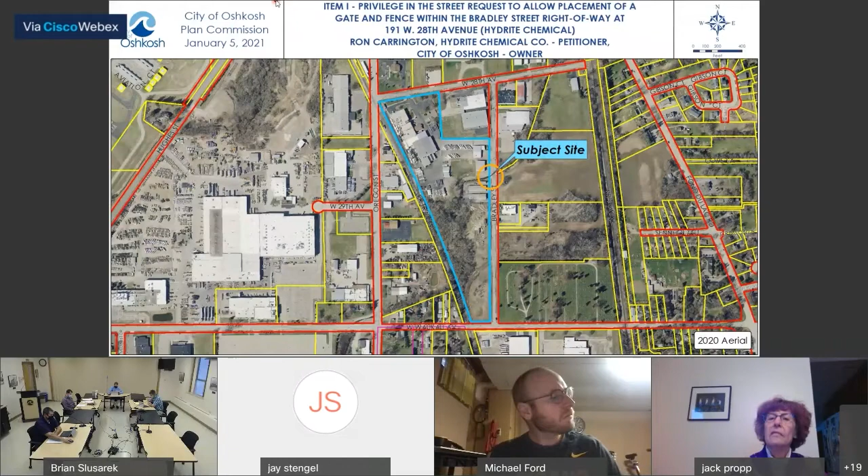Hydrite Chemical is requesting a privilege in the Bradley Street right-of-way to allow construction of an 8-foot tall chain link gate and fence with barbed wire, which will run over a portion of Merritt's Creek. The proposed gate and fencing is part of the new rail yard development, which received SIP approval in mid-2020. The subject site consists of a 19-acre parcel with frontages on West 28th Avenue, Bradley Street, and West Waukau Avenue. The property is occupied by Hydrite Chemical and includes industrial buildings, storage buildings, paved parking storage, outdoor storage areas, as well as a railroad connection. The general area consists of mostly commercial and industrial uses with some vacant parcels.

This up on the screen is the specific location of the proposed privilege request. The new rail yard requires a secure perimeter per the Department of Homeland Security guidelines. The east boundary along Bradley Street includes a crossing of Merritt's Creek, which is a stream that goes underneath Bradley Street.

With the existing culverts going underneath Bradley Street, there isn't enough room on private property to install the perimeter fencing, so the applicant is requesting to install the fencing where that blue line is shown, which encroaches into the Bradley Street right-of-way. The applicant states that this is a temporary situation. In 2022, the Department of Public Works is planned to reconstruct Bradley Street, and at that time the fencing will be properly addressed so it is located entirely on Hydrite's property. The proposed location of the fence will extend about 7 feet beyond the western edge of the existing roadway, approximately where the blue line is shown.

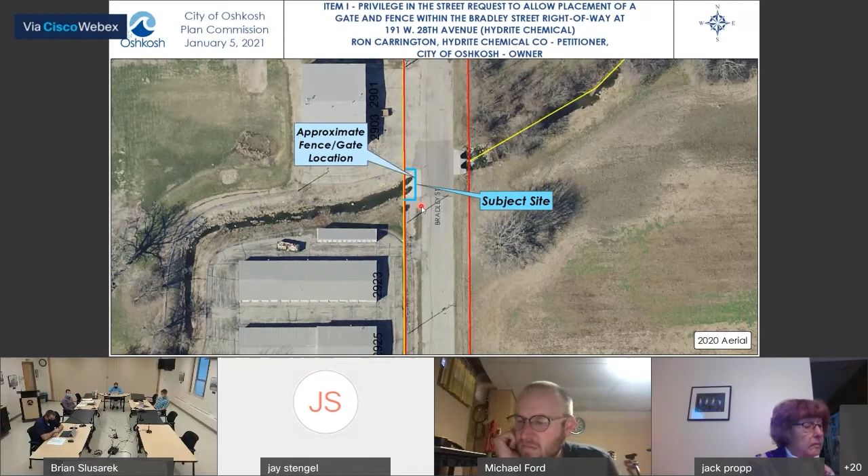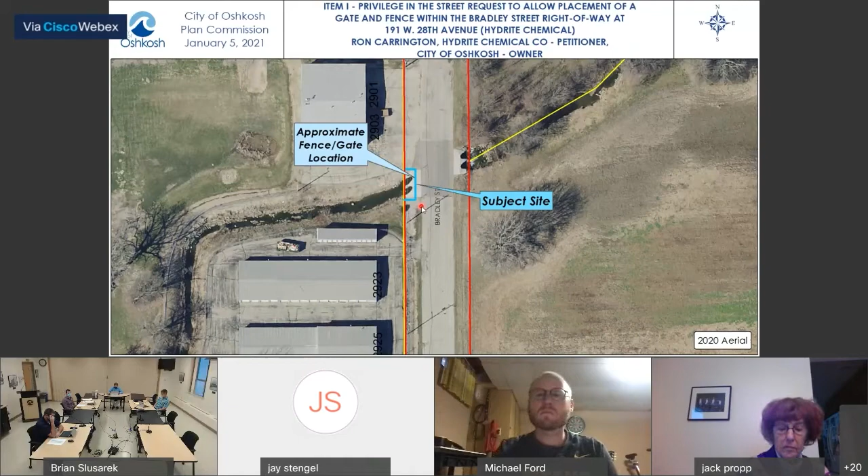The Department of Public Works has reviewed this request and provided comments, which have been included with the conditions that I will briefly go over. Since this privilege request is meant to be temporary and is a requirement of Homeland Security, staff is supportive of this request and recommends approval of the privilege in this right-of-way with conditions.

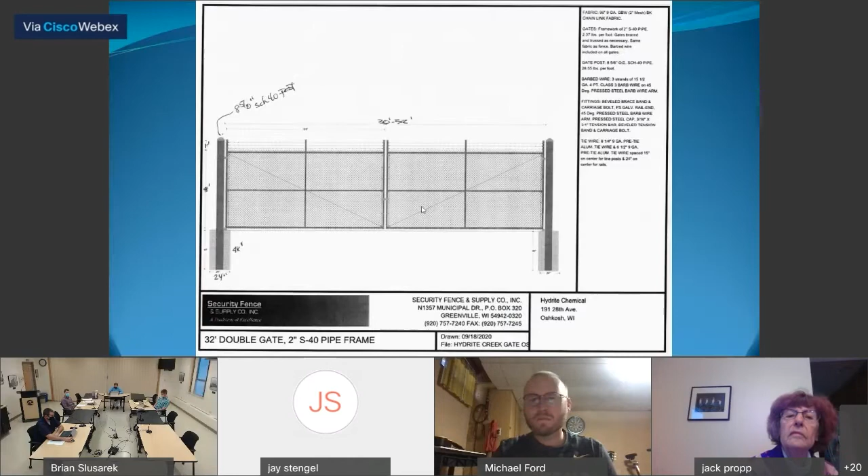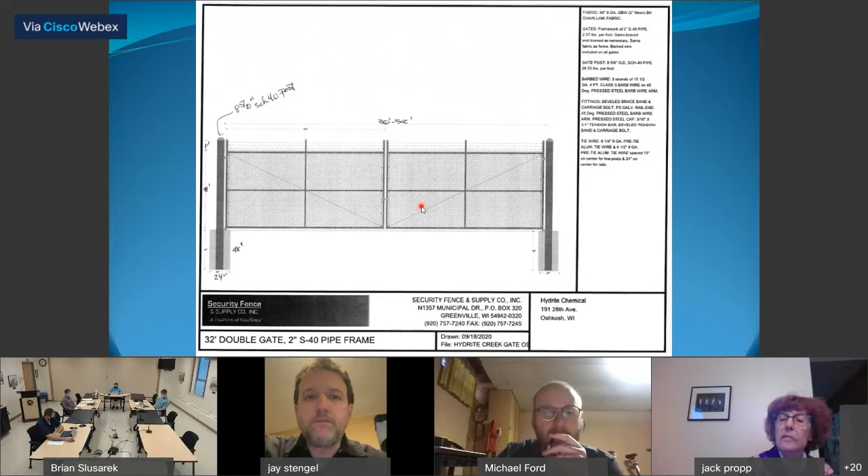This is the site plan provided by the applicant, and another site plan there. This is a proposed layout of the proposed fencing. The fencing will have a gate mechanism to allow city access to the culvert. With that, staff is recommending approval of the privilege request.

As you've seen before, privilege requests typically have several conditions associated with them. I won't go through each one, but there are 12 in total. The city attorney's office, the Department of Public Works, and the applicant will work together to prepare the final agreement documents.

Okay, thank you. We'll now come to the commission. Anybody have any technical questions? I do not see any hands raised.

Seeing none, then we'll go to public. Anyone here from the public like to speak to this item? Again, I do not see any hands raised as people wanting to speak.

Seeing none, bring it back to the commission for a motion and any other discussion. Anyone from the planning commission ready to make a motion?

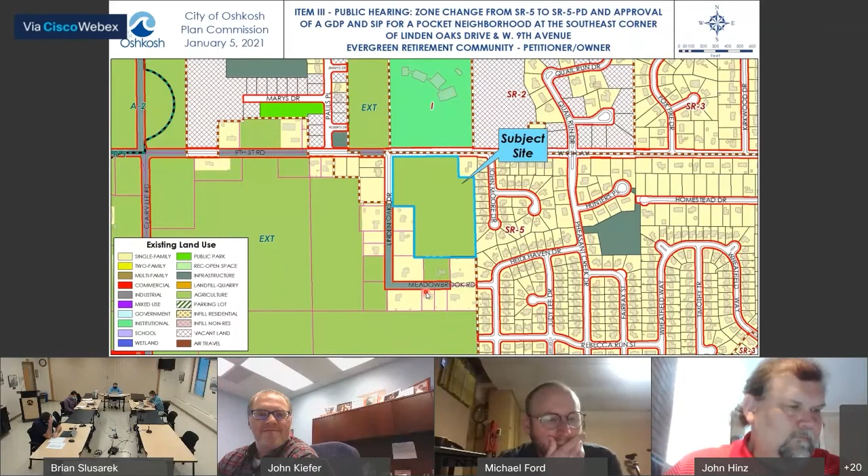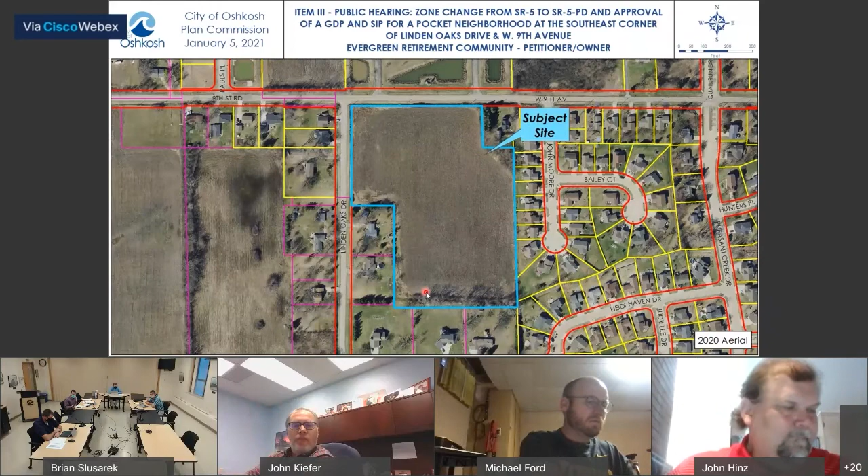This item includes a rezone to a planned development overlay, as well as a request for general development plan and specific implementation plan approval. The subject site is located at the corner of West 9th Avenue and Linden Oaks Drive. It's a vacant parcel, about 10.5 acres in size. The surrounding land uses are predominantly single-family, along with a church to the north. The 2040 comprehensive land use plan recommends low-density residential for the site. It is currently zoned SR5. Here's a view of the subject site.

The applicant is requesting to develop a 40-home pocket neighborhood. It will function similar to a residential subdivision; however, the development will fall under the purview of a multifamily development, as all homes will be located within a single lot. All homes will be single-family ranch-style residences for older adults, and there will also be a clubhouse on the north side of the site. Since the SR5 district does not allow for multifamily uses, the applicant is requesting to rezone the site to have a planned development overlay, and then requesting a BSM to allow the multifamily use.

The proposed pocket neighborhood will have a density of 3.79 units per acre, which is in line with the SR5 district provision of 5 units per acre. It's also consistent with the 2040 comprehensive land use plan recommendation of low density residential. Staff does feel this is an appropriate use for the site, so we're in support of a BSM to allow the multifamily use.

The applicant did hold a virtual neighborhood meeting on December 1st, and the neighbors were generally supportive of the proposed land use. Staff is supportive of adding the planned development overlay, as the intent is to accommodate a unique land use. As far as site design, there will be two accesses, one from West 9th Avenue and one from Linden Oaks Drive. Each home will have a 2-car attached garage for parking.

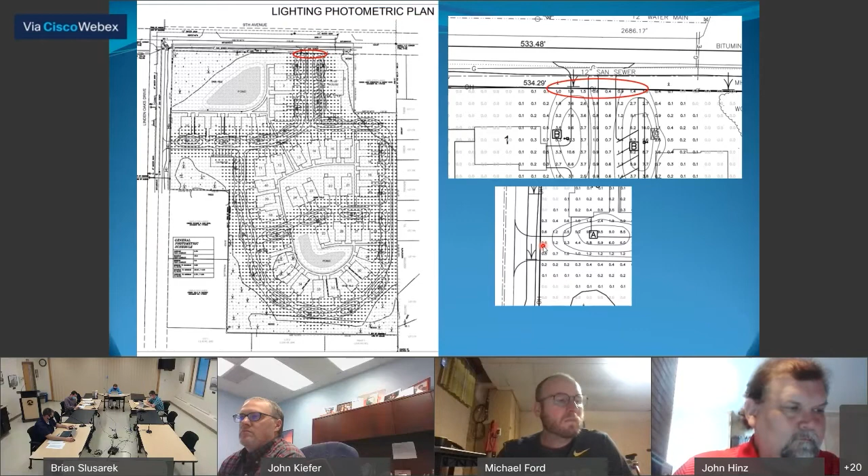Here is the lighting plan. It meets the 0.4-foot candle minimum requirement for all parking and circulation areas. It also is within the maximum of 0.5-foot candle light trespass at all property lines, with the exception of the 9th Avenue entrance, which exceeds it, and it's right about at the maximum at the Linden Oaks entrance.

The applicant is requesting to exceed that maximum at the entrances to ensure visibility. Staff is supportive of that BSM as it should not negatively impact the neighboring properties.

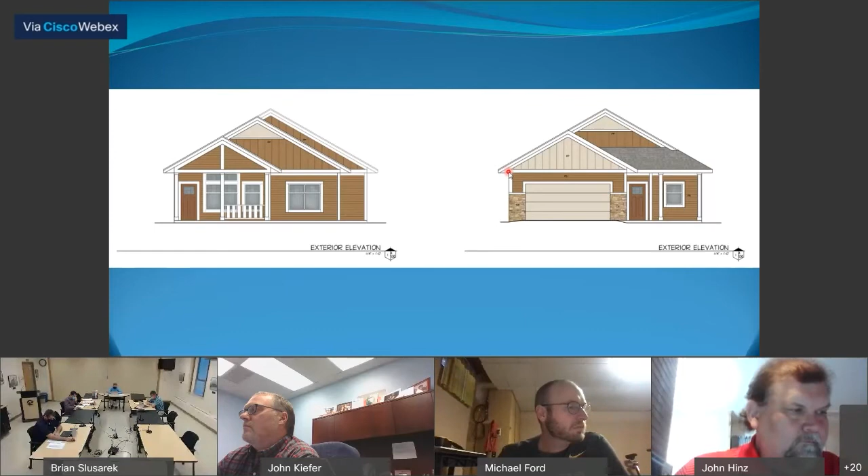Here are the renderings of the residences. Considering these are single-family residences, staff would be applying the single-family residential standards, and these homes do meet the material requirements for single-family residences and also the 25% door and window area front facade requirement for residential structures.

So these residential style appearances of the facades should be compatible with the surrounding single-family residential land uses. Overall, staff is comfortable that the applicant has adequately offset the requested BSMs, and the overall site is complementary to the surrounding area. Staff recommends approval of the rezone, GDP, and SIP with the findings and conditions listed in your staff report.

Okay, thank you. Bring it to the Plan Commission for technical questions.

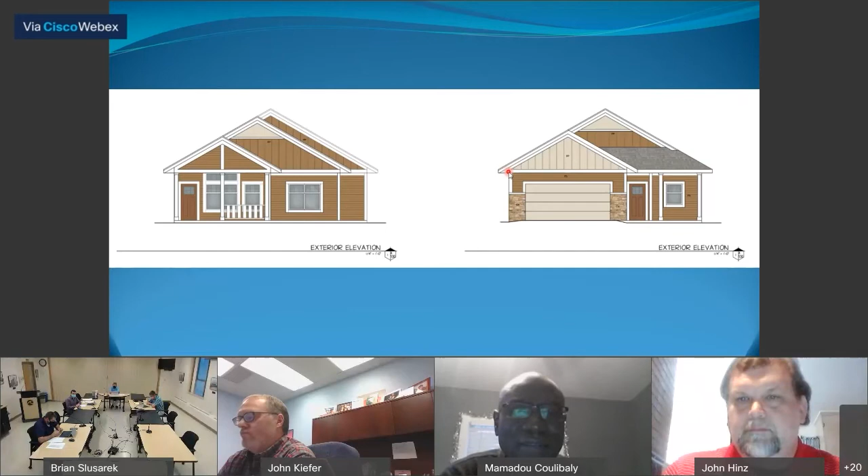I see 2 ponds in the area. Are there retention ponds for flooding purposes, or just for... Yeah, those are part of the required drainage plan. They are still finalizing drainage plans with our folks from Public Works. Could you repeat that, please? Yeah, those will be part of the stormwater management plan. We have not, I believe, approved final stormwater management plans. They are still working through that process with Public Works.

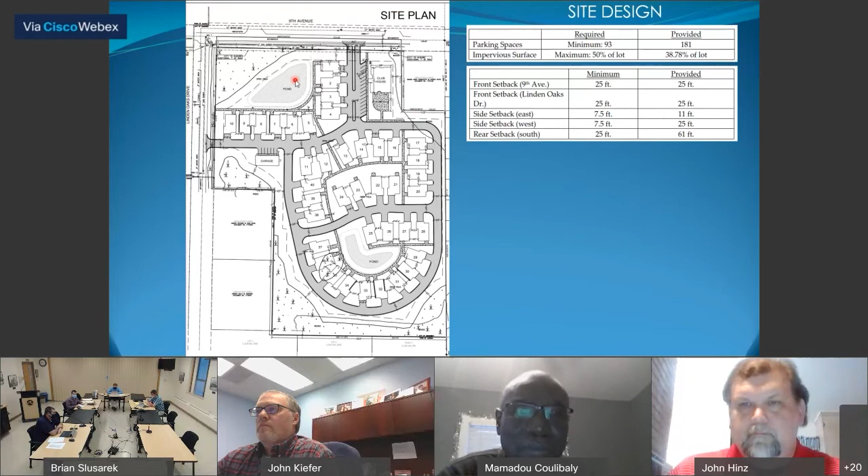Okay, yeah, I was just concerned about the amount of pavement in the area and flooding issues. And is there a playground or a park nearby? There is some dedicated parkland just northwest of here as part of a single-family residential development. This specific pocket neighborhood is for Evergreen Manor, which is a retirement community. Which would typically generate less of the demand for use. But there is, like I said, just northwest of here, 9th Avenue, but Pickard Avenue Estates does have dedicated parkland as part of that.

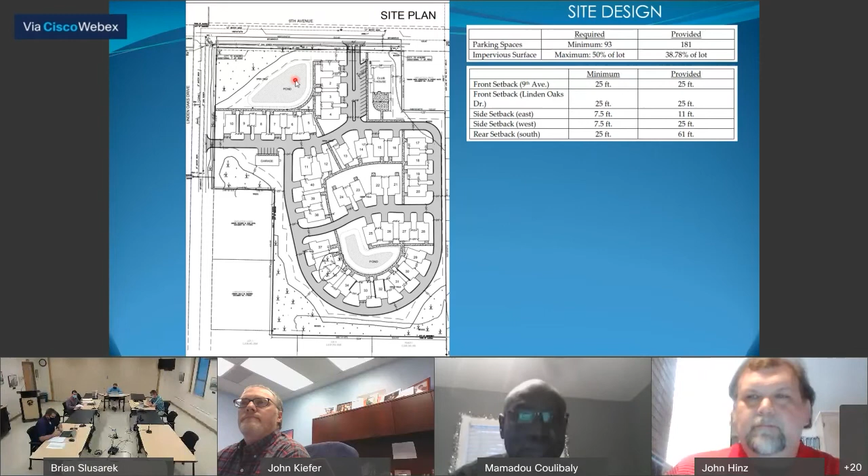Okay. Okay, I see Miss Davey's hand up.

Yes, I was wondering about the parking spaces. Are there 4 parking spaces for each housing unit? Yes, we would consider they have 4. They each have a 2-stall attached garage and sufficient length and width for 2 open stalls in front of the garages. For single family style development, the code does permit stacked parking spaces behind the garage, so they would actually have 4 for each unit.

Okay, I was trying to figure out how we came up with 181. The rest are in front of the clubhouse and in front of the garage, right? Correct. Okay, thank you.

Any other technical questions? Justin? Thanks, Justin here. Just a quick question.

This is a 5-acre plot of active farmland. Has anything been developed with the city related to tracking of farmland loss? And then part two, I know the sustainability plan that the city has adopted includes encouragement for farmland preservation. I think this development makes sense, but is there any reach out or commentary provided to the sustainability committee related to projects that end up reducing our farmland?

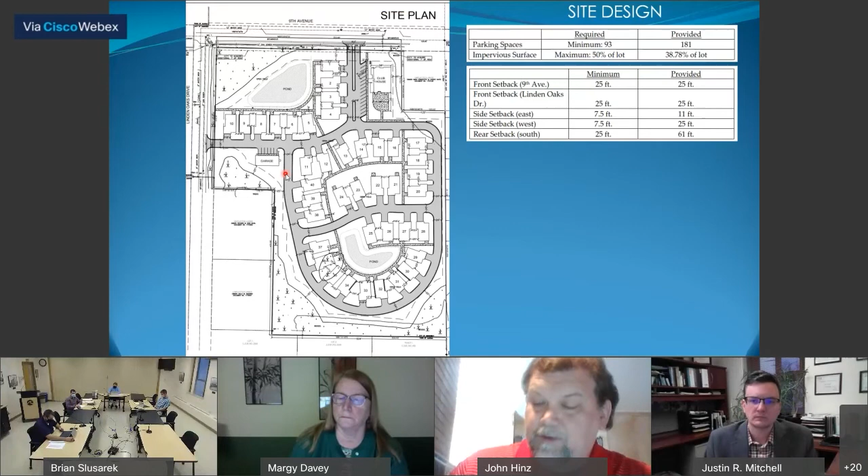Okay, any other technical questions on this? Seeing none, I'll open it up to the public. Is there anybody from the public here who would like to speak to this item? I'll ask again if anybody from the public would like to speak. I do not see any hands raised.

Seeing no one here from the public to speak on this, bring it back to the commission for a motion. I move to adopt the finding and recommendation as stated by staff. Second, Justin here. Okay, do we have any further discussion on the motion?

Look at Mr. Mitchell. Thank you. I was just hoping that somebody from the group proposing this could maybe talk a little bit about the facilities themselves, the homes, the features, the accessibility accommodations and whatnot. Is there nobody here? This is Ken, I'm here from Evergreen.

Great, could you talk a little bit about the homes and the accommodations they'll be providing, in terms of accessibility features that make the homes... Yep, so with the homes, similar to our campus here at 1130 North Westfield, the homes are zero entry when folks are coming in. That way we're not dealing with steps, which is typically the most accessible item we're looking at.

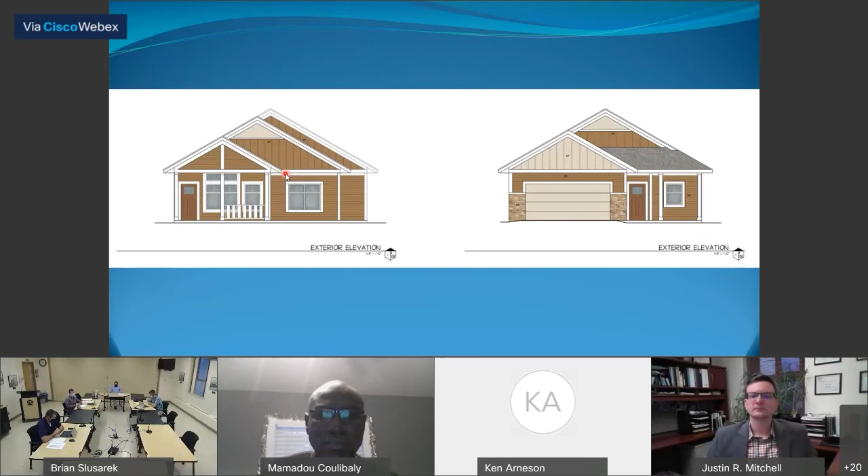Okay, any other discussion? Okay, please call the roll.

Ms. Prop, present. Mr. Coulibaly, aye. Ms. Davey, aye. Mr. Ford. Mr. Kiefer, aye. Mr. Mitchell, aye. Mr. Perry, aye. Mr. Stengel, aye. Mr. Hinz, aye. Motion carried 8-0.